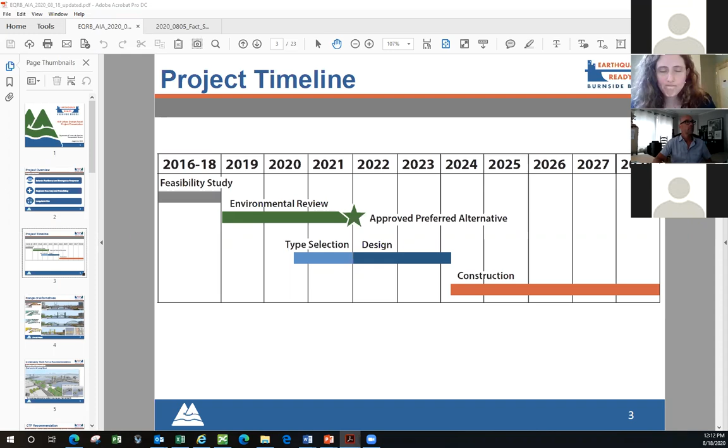So next slide, I just wanted to go over that short list of alternatives that we have been evaluating in the environmental review phase. Starting at the top, we have what we call an enhanced seismic retrofit, which is largely preserving the existing bridge today, replacing components that have reached the end of their service life, but bringing the current bridge up to current seismic code.

Now, the second option is proposing a new movable bridge, same location, same alignment, same touchdown points, with conventional span length—meaning distances between the support columns less than what's out there today. We're calling that the replacement short span alternative, and we're exploring that in either a bascule movable span option, like there's out there today, or the vertical lift movable span option, like say the Hawthorne Bridge.

Next up, we have an alternative that's a little bit different than the replacement short span. We call it the replacement long span. It's again a new structure in the same alignment, same touchdown points, however with longer distances between the support columns. It's hard to tell if you look at the two middle images—the support columns below are in dark orange, so you can see how there are less of those dark orange support columns in the river if you compare the two alternatives. We are exploring this option as well, either a bascule movable span or a vertical lift movable span.

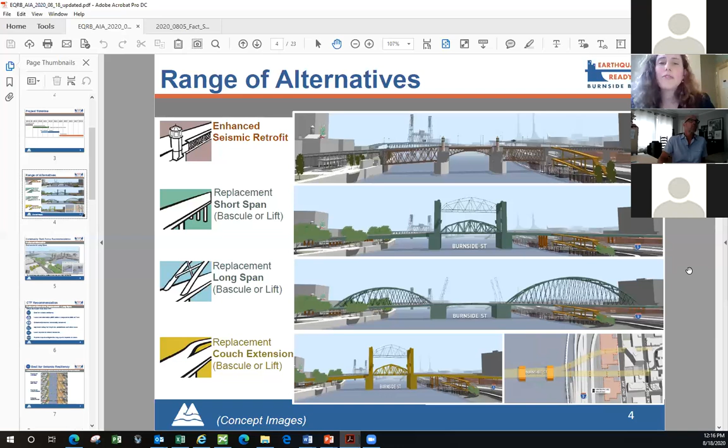So those are the four we've been evaluating. And as I mentioned, we have worked with our community task force to select one as the recommended preferred alternative to be included in our upcoming draft EIS report. And that alternative is the replacement long span.

I want to walk through a few of the reasons why this alternative is scoring very well in our evaluation process. But first, let's look at the image on the screen. What's presented here is a concept of what a long span bridge could look like. Shown in the center of the river is a vertical lift, movable span type. Flanking it on either side are tied arches, similar to the Fremont Bridge or Sauvie's Island Bridge.

This is one of the fixed span structure types we're exploring in our type selection study phase, the tied arch. We're also exploring cable stay options, similar to the Tillicum Bridge, and a through truss option, similar to the Hawthorne Bridge or the Broadway Bridge. And as you can see in the lower right-hand corner of the graphic, we're also looking at a bascule type, as there is today.

So these are just a preview of what we'll be evaluating in the type selection phase. But if I can draw your attention to the shorelines on either side of the river, I just wanted to note that there really aren't any foundations at the shoreline like there is today. And that's one of the key benefits or features of this alternative.

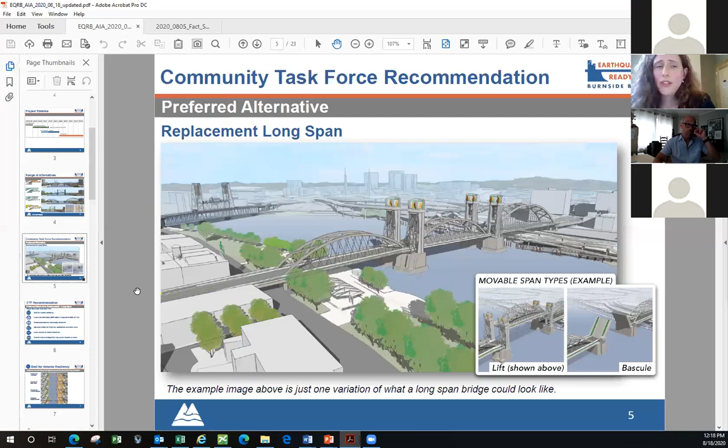Next, I want to walk through at a high level some benefits of this alternative before diving into them in more detail. When we developed our evaluation criteria and our technical team looked into all the alternatives, we found that this alternative was the best in terms of seismic resiliency, because we have fewer foundations in the river, which reduces structure in highly liquefiable soils. That sets the structure up to perform better than other alternatives in the event of an earthquake.

And while it does look like a lot of structure, it's actually the least cost alternative of the group, primarily because the less you build in the ground, the less risk you have overall, which can be costly to a project, plus fewer ground improvements needed in this liquefiable zone. So it's the cost leader of all our alternatives, and that range right now is sitting at 825 million to 950 million, all-in soup to nuts for the project, escalated to the mid-year of construction.

This alternative also allows us to preserve or enhance some existing community resources. The two top of mind for me are, first, the Burnside Skate Park. Through this alternative, we'll only be impacting the skate park so far as temporary closures, so the skate park itself will be able to remain largely in the state it is today. That's definitely a win for the project to date.

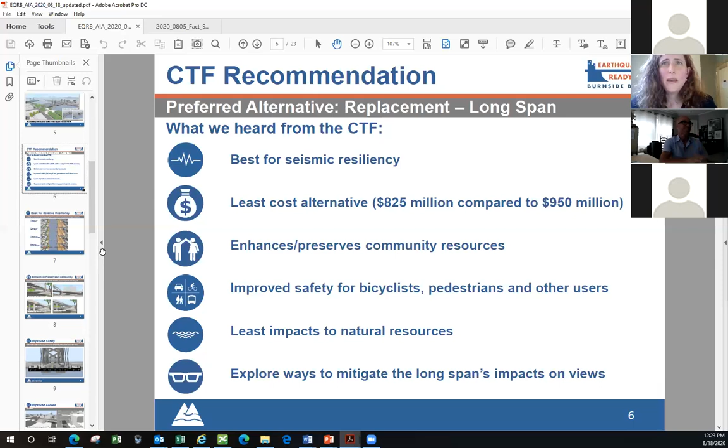I've explained a lot of the benefits verbally, but I wanted to show some images to reinforce some of them. I mentioned that this alternative was the best for seismic resiliency. In the graphics on screen, the light orange shaded area is the liquefiable soils, and the dark orange columns represent the proposed support structure. As you can see, the replacement long span on the top row has the least structure in that highly liquefiable zone, and we feel that sets this structure up the best for the Cascadia subduction zone earthquake.

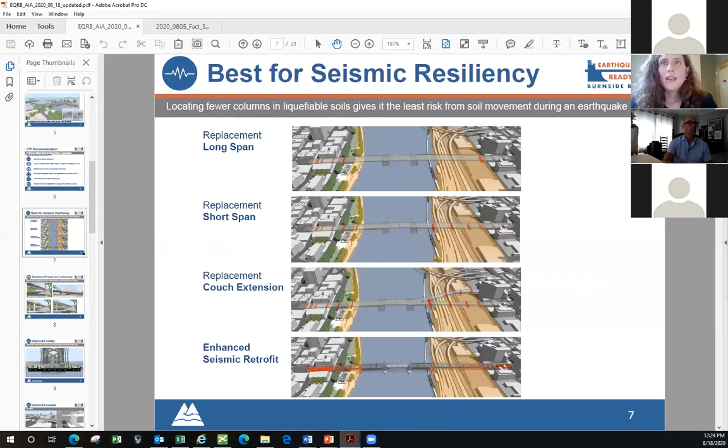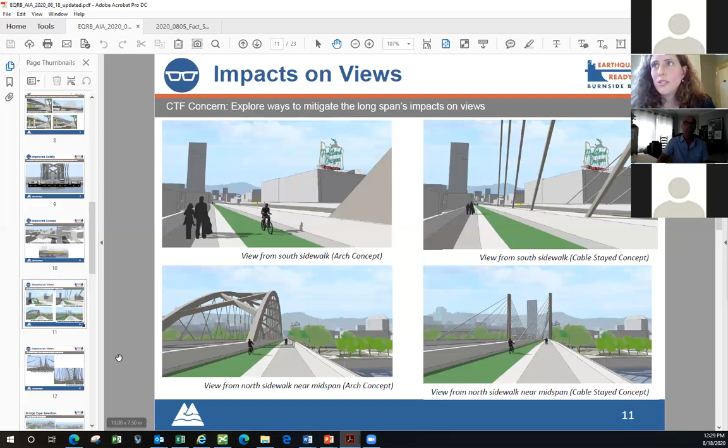This is looking west, and the following set of images is looking east, showing the view from the structure on the sidewalk for either a cable stayed option or a tied arch option. We've heard from many voices that if we could minimize the height of the structure, that would be preferred.

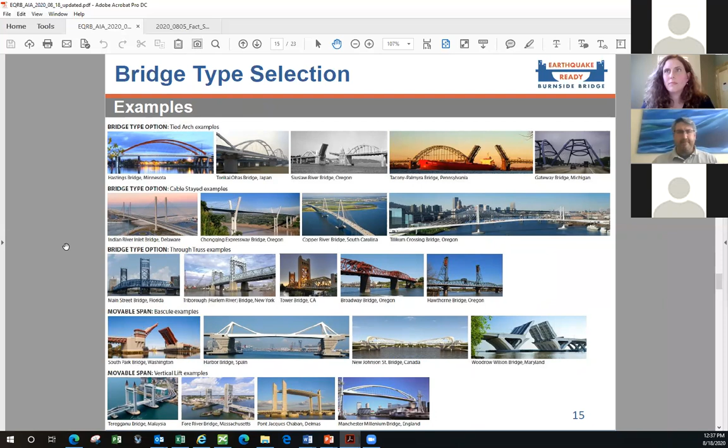So one of the things we did, a pretty early activity—and some of the folks on this Zoom call were part of this discussion—is we asked an urban design working group to start thinking about interests. What could be? What are some themes, some goals, some objectives that we can start centering on, especially in this type selection phase where we want to evaluate based on some of these themes and perspectives?

There's a lot of work to be done still. I think we're right now scheduling 8 different meetings for a visual and urban design working group to provide even more feedback and to hone some of these thoughts. But really, use that to create an evaluation criteria to apply to this array, this grid of options, and help select an alternative that would then be pushed into final design for all the details to flesh out.

So some of these bullets are what we've heard so far. Attributes like it being in the heart of the city, quite literally the definition of the grid, of Portland's grid. The centroid of that is dead in the middle of the bridge, right at this point. So don't do it because you're in the middle of traffic, but literally you can stand on the 4 quadrants of the city on top of the bridge.

Serving as a community connectivity. We've heard quite a bit that this is a community bridge, a bridge that connects communities on either side, as opposed to calling it a more urban, regional bridge. So there's this idea of community connections.

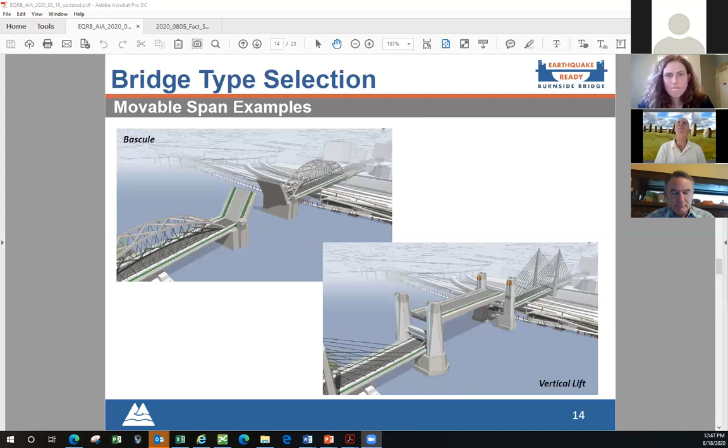There's another chat item there, Steve. Yeah, well David, he's the one that put that up there. So go ahead, David, why don't you just...

Sure, I can speak to that. I was just sort of tapping it out on the keyboard, but what I have written is, does the county or the design teams have a set of urban design guidelines regarding the bridgehead connectivity for community? Whether that's being formed early on.

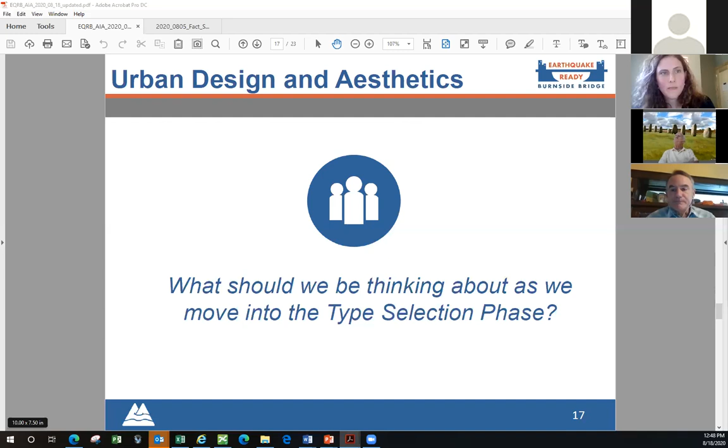It sounds like a general kind of thing, but it actually folds right into what you were just responding to, Steve, in terms of Patty's question—the second you move some set points further into the process, the longer they have a chance to grow in everyone's mind. We definitely don't want to see a purely vehicle-dominated conversation. The priority for emergency situations is running a lot of vehicles across that bridge, but what does it do for the rest of its life? Megan pointed out the points about cleaning out the underside of the bridge. Certain options open up spaces under the bridge that right now are fairly dingy, certainly on the west side. Are there some guidelines or thoughts towards that?

Yeah, I can take that one. It's definitely on the work plan agenda for our urban design working group to come up with a design vision, goals, and objectives for this project, taking into account the variety of urban design guidelines we're already aware of and have been collecting. So we don't really have something to share today, but it's certainly something we'd be happy to check in with this group on as it develops.

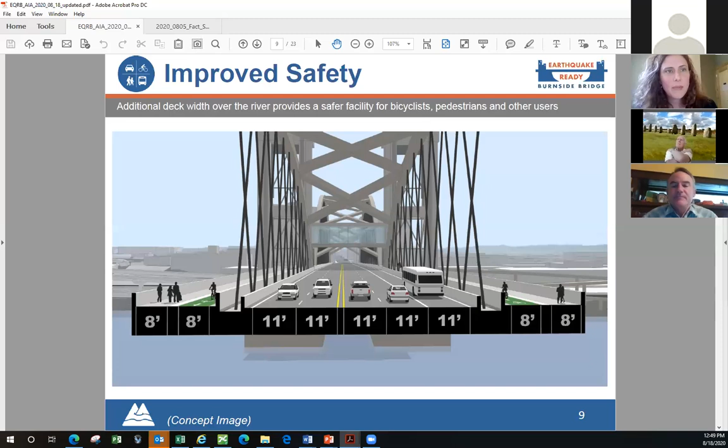To your second point about the space under the bridge, it's a very interesting site because the county doesn't actually own any of the right-of-way under the bridge. I think we have a little sliver on the drip line from when the street was widened back in the day to construct this bridge, but the bridge is largely on city right-of-way. So it's really going to be a collaborative process with the city and other agency partners, specifically parks, on how we reconstruct the space under the bridge. It's certainly not something we can decide on our own, but we're well aware this is an opportunity to reshape that space. It's definitely going to be a joint effort.

Well, that's great. And I'm sure you had those kinds of thoughts in mind, and I just wanted to get it out there.

I will say it's critically important to think strategically at a moment like this, while we're churning through the facts and checking the environmental review and the engineering options and costs, to make simple statements like: is this an either-or kind of project, or is it going to be a both-and kind of project? And I would argue the only way for it to critically succeed—if, as Steve points out, it's at the actual nexus of the city, right in the center of the city—is that it has to be both-and. It has to both serve its functional requirements and be a value add to the overall community.

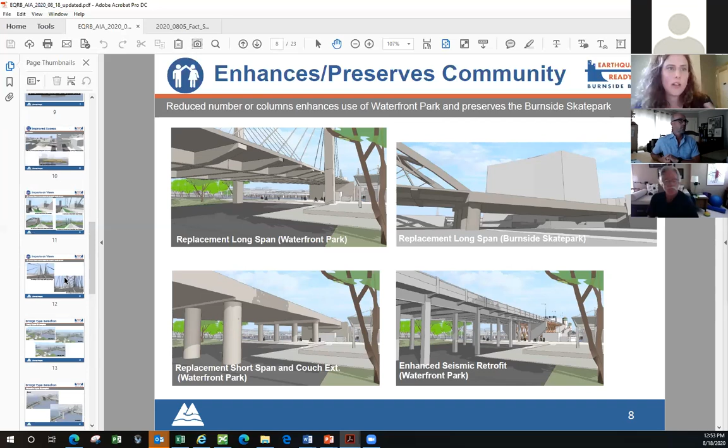I think we put together a small group early on just to get the conversation started, but now that we're at this point in the project where we have a preferred alternative and we're starting type selection, we want to broaden the group and bring in more design professionals, community partners, and look at what the agendas of those 8 meetings are going to be and what we need to accomplish in time for our final EIS. We don't have all those details set yet. We're looking at the Tillicum crossing group, maybe an urban advisory group or something like that, looking at what that group did and the types of members who sat on it to see if we want to model our group off of that.

Okay, Michael, did you have an additional part of your question?

Yeah, it's kind of related to all this, and it's kind of the process moving forward. It's unclear in my mind who's doing what. You mentioned parks in that mix, the county's obviously in there. Hearing a lot from Patty about the design, getting into that earlier than later, I think is absolutely necessary. But I'm curious, as we walk through some of the examples, there's a lot of very well-known designers in that other bridge discussion that David and others have mentioned. I'm curious how the county is approaching the aesthetics of this. I would not be able to say this strongly enough, the importance that this one bridge, in the center of the city, is designed extraordinarily well and is innovative and thoughtful and does a number of things other than just moving vehicles. So I'll just leave it there.

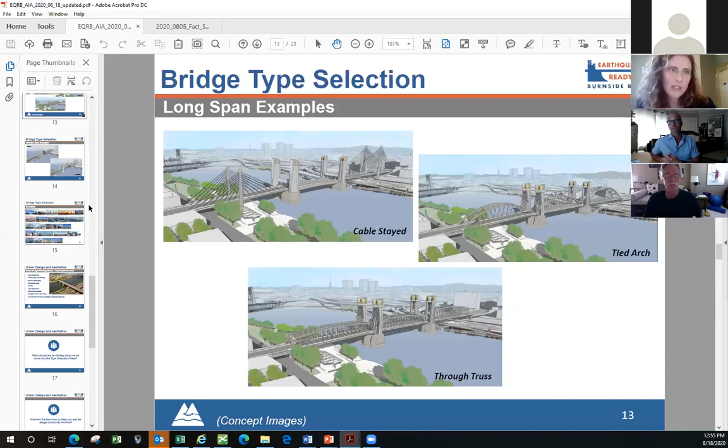Yeah, thank you, I appreciate that comment. I think that's one of the reasons why we're out here briefing groups, is to listen to the comments and hear topics that we should be considering moving forward that will help influence and shape this urban design working group. I just wanted to briefly mention how our project is structured in terms of our subcommittee groups. We actually have, I think, maybe 14 different working groups as part of this process, with urban design being one of them.

All the information coming out of the working groups feeds up into a community task force that is about 22 or so members of the community representing a cross-section of businesses, neighborhood associations, river users, social service providers, and community members at large who are directly impacted by the project. Then we have a policy group of elected officials who receive recommendations at key milestones from the community task force, and the policy group makes recommendations to the Board of County Commissioners, and then ultimately FHWA, who is the lead agency for the project.

So with that bit of information, I just want to show you the broad, encompassing nature of our project and who we're working with. Certainly the city is a huge partner in this project. We have a city technical advisory group, and we've been keeping each of their commissions and city councils updated, doing a number of commission briefings and council briefings as well. I think our project touches pretty much every bureau right now.

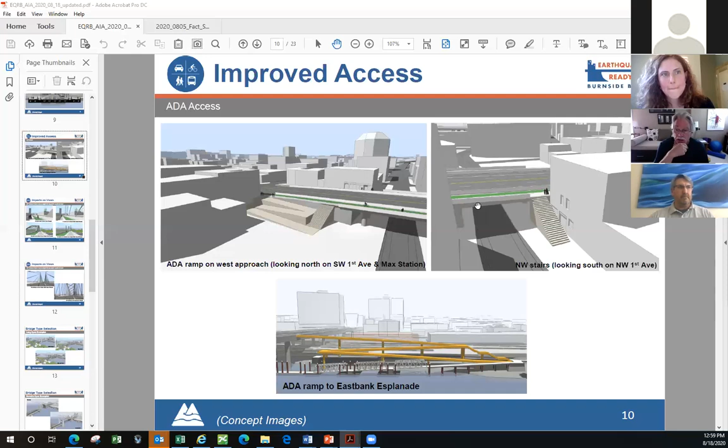Okay, I don't see any other questions in the chat room. We are at about 1 o'clock, but I would invite anybody who's got a burning question or just needs more information about something to speak up.